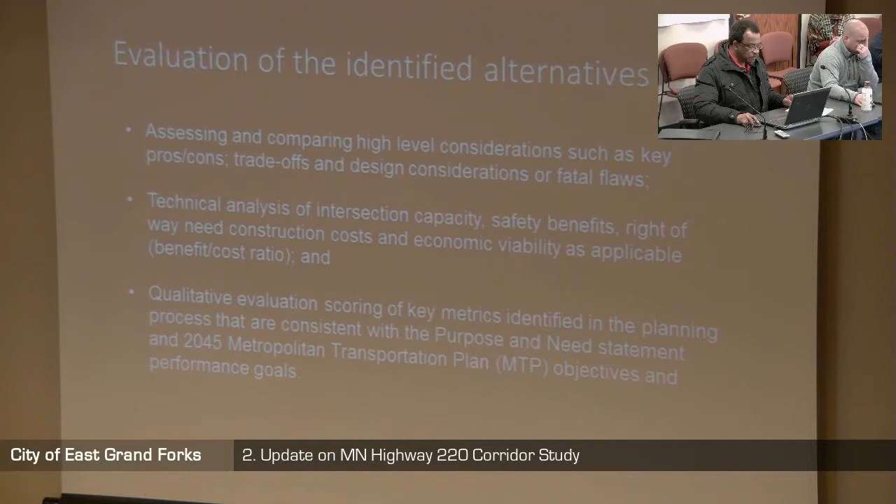It's important for us to realize that these alternatives will be incorporated within the 2045 Metropolitan Transportation Plan, and therefore we need to continue advancing them toward further implementation. The alternatives that you will see today are...

These alternatives include intersections from 9th Street as far as 140th on the 220 North Corridor. Those fall into 4 kinds of types: access and traffic control device considerations, access management, traffic signal, and pedestrian improvement strategies.

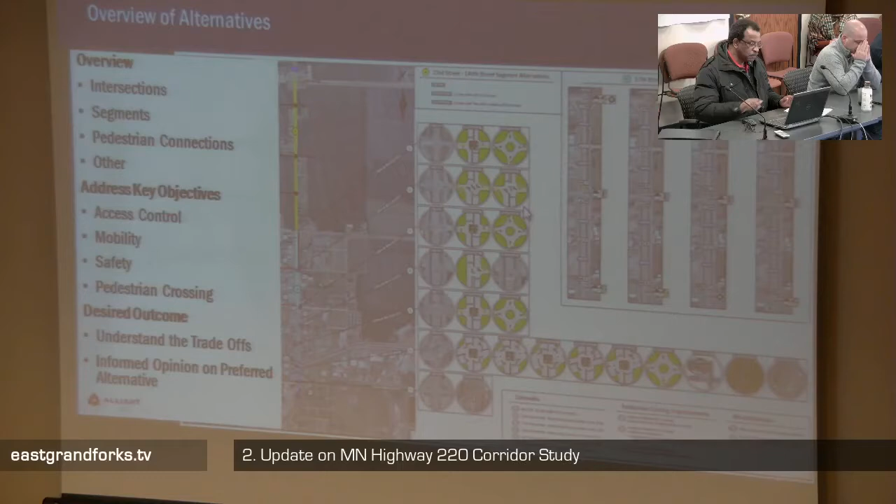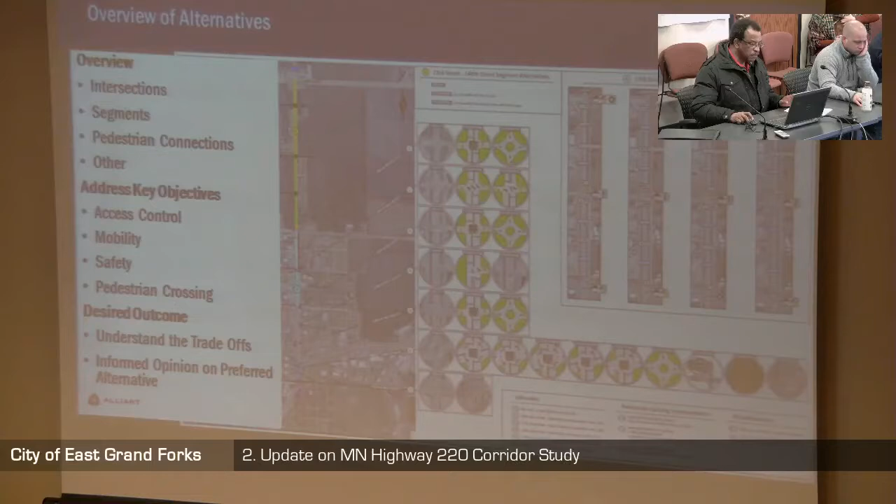So in one of the packages that you received, you can see them outlined, each one of them, including the pros and cons of each, and also the objectives that each proposed strategy is trying to address. So this is my brief introduction, and now I'll leave you with Engineer Darren Lash. You may continue.

Good evening, I'm Darren Lash, Planning Director for the Northwest District for MNDOT. I guess today I'd just like to give a little bit of the why, some of the findings we discovered during the study, and then go over in more detail the preferred fixes that were identified, and our timeline for constructing those. I'll try to be as quick as possible.

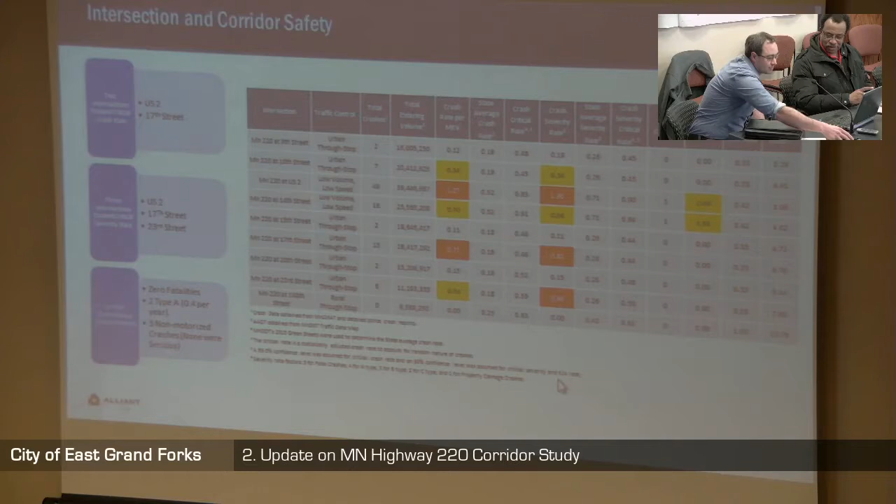I don't know if I'll stay within 2 minutes, but can you check to make sure your mic's on too? Is it flipped up? It should be up. Yep, right.

Kind of first the why—this really came out of, a few years ago we did the Business 2 study, Business 2 and US 2, and it was identified and talked about: well, why aren't you looking at 2 and 220? That's where the problems are, and that's been identified a number of times, and it's in our safety plan—always one of the top intersections in our safety plan. And we didn't have a real good solution for what to do there, so we thought this study could really help guide us on what improvements we can make.

The other critical intersection we need to make improvements on soon is 14th Street. That signal—some of the wiring and conduit under the pavement is in very poor condition—and if we have any problems with that wiring, we really can't fix it in the interim.

So we need to replace that signal system very soon. And before we replace it, we want to make sure that's the correct fix, that's the long-term vision for that intersection. So those are kind of the two driving forces behind why MnDOT wanted to move ahead with the study.

As we started investigating this corridor, we did confirm that US 2 and 220 is a bad intersection. 49 crashes in a 5-year period, well above what you'd expect to see at an intersection with those volumes and that lane configuration. So we documented that.

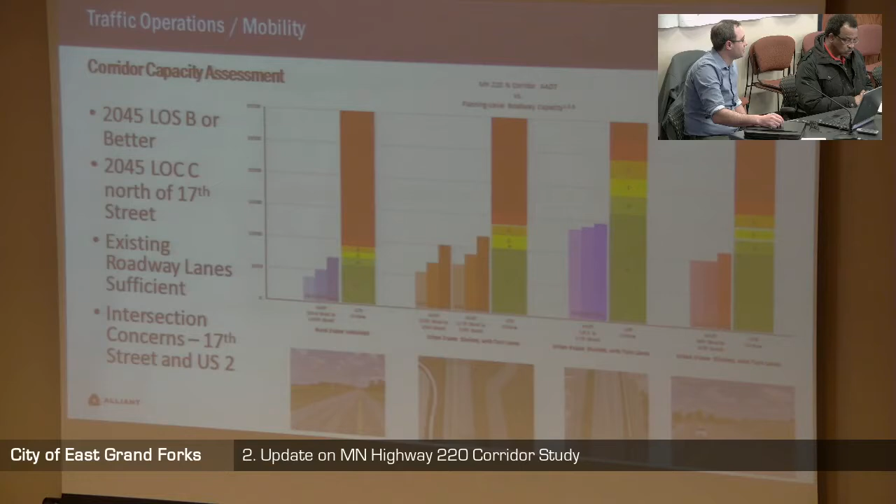So those are the high-level issues identified with the corridor study. This is a rough outline of the area we looked at - I'll focus most of my attention from US 2 out to 23rd, since that's where I see the bulk of the recommended changes.

As Jairo mentioned, we looked at signals, roundabouts, and some different geometric changes, especially at 2 and 220, plus a few tweaks at 20th and 15th. The preferred look at 2 and 220 for a roundabout would have to be a 2x2 roundabout with 4 lanes coming in on all sides.

Comparing that with some of the roundabouts we've done across the state, you generally still see a lot of crashes - you get your serious crashes down, but your overall crash number would probably go up. So we ruled out a roundabout at that location pretty early in the process, which led us to different signal configurations and geometric changes.

As you go over to 14th, we looked at a roundabout there as well, but with 4 lanes on the north and south leg, it's a 2x1 roundabout, and you still need a pretty large diameter. With the frontage roads and proximity to the highway, it really wasn't feasible to fit a roundabout in that location. So the study identified that a signal still needs to remain at 14th.

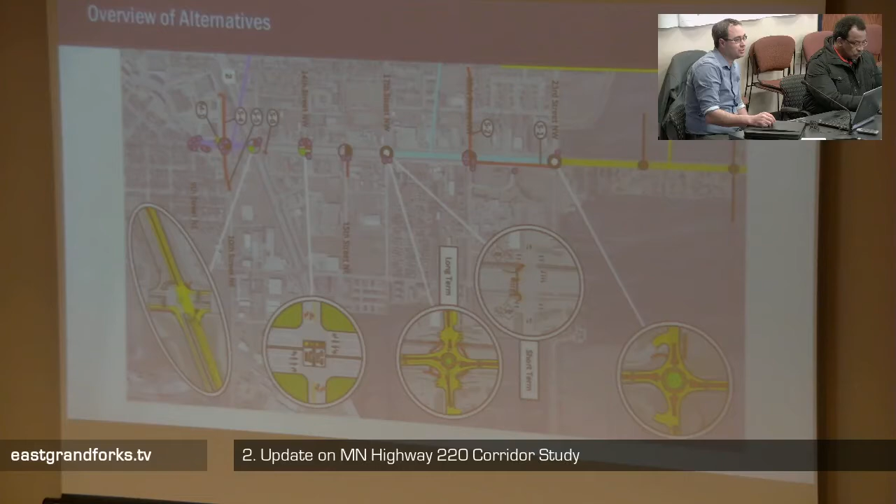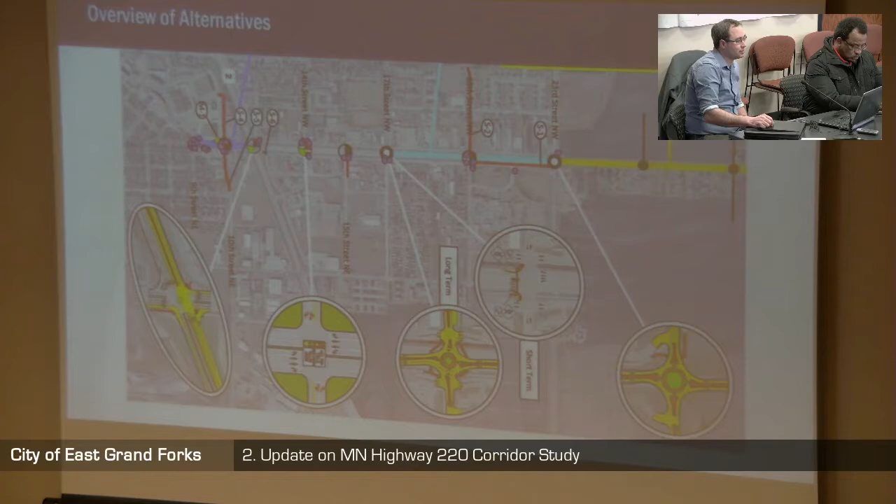As you go up to 17th and 23rd, that's where we make the switch from a 4-lane facility to a 2-lane facility. Single-lane roundabouts have a lot of advantages, with a significant crash reduction and some operational benefits. When you compare putting a signal at 17th and 23rd to a roundabout, you see significant delay reduction with the roundabout, whereas with a signal you're seeing more delay than you have today. So there's real advantages to that roundabout.

I'm going to go over these in a little more detail for each intersection. Looking at 2 and 220, we're looking at mainly some minor tweaks. This includes offset left turn lanes at the center, which is probably going to mean some widening. That just provides better sight lines, and there's going to be less interaction with the left turning movements.

We also looked at adding flashing yellow arrows in the permissive movement instead of a green ball. That's basically a yield left turn movement at a signal, but we found there are some safety benefits to that, and it gives you the option to have, at times, a protected left turning movement where you get the green arrow and red arrow, and other times the flashing yellow. So you see some safety benefits with that.

The other big concern at this intersection is those free rights. Looking at the northwest and southeast quadrants, those free rights can be a challenge because sightline-wise you're cranking your head way back to see those vehicles, and there's really not an acceleration lane, so you have to make a quick merge. So you either get people trying to squeeze into a gap that's too tight, or someone slamming on their brakes and the person behind them doing the same, causing rear ends. So we're looking at eliminating that in those two quadrants. It has a minor impact on operations, but we feel the safety benefit is important.

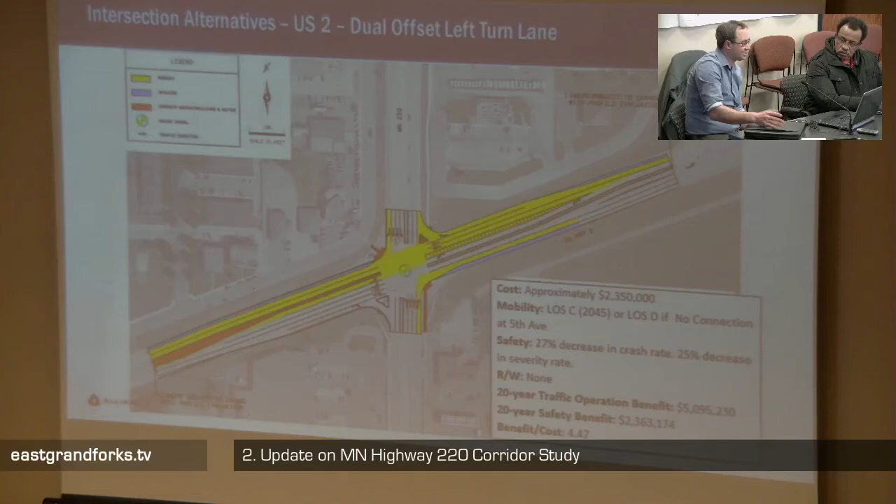On the other two corners, we really couldn't do that because of the skew at the intersection — trucks couldn't make that turning movement without the free right, so those will remain, but I don't think those are as problematic. In a nutshell, we're hoping for about a 30% reduction in crashes. Still not certain if we got the right answer here, but other than looking at more major improvements along Highway 2, I think this is the next step, and hopefully we get that 30% reduction, which would put us into more of the average we'd see in other communities.

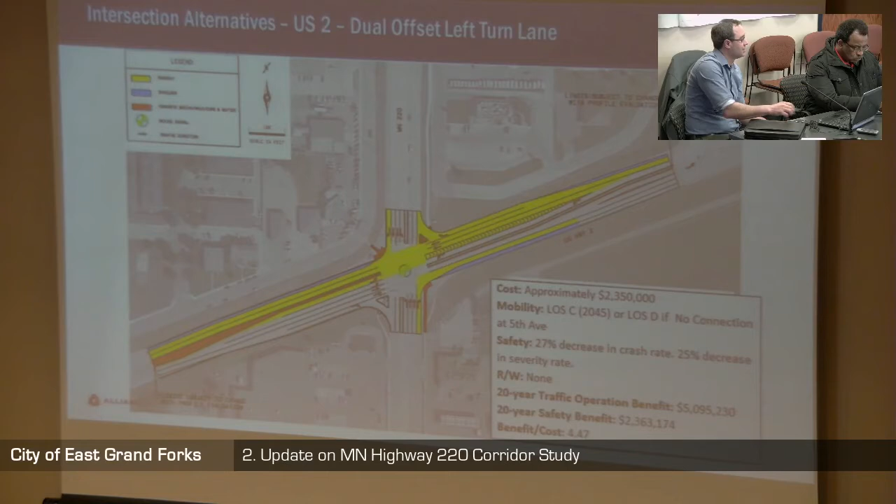Looking at 14th, that one's going to stay very similar. One of the big advantages to this one and 2 and 220 is if we update those signals, they can all be interconnected, so the signals are talking to one another. That will improve flow of traffic and move those queues through so there's less stop and go, less chance for a rear end — that's where you see the majority of crashes, rear ends at these signalized intersections. So not a lot of other changes at this intersection.

Moving up to 17th, this is where we've gotten a lot more discussion than we've had so far, and what I'm showing here is kind of an interim solution. Looking north of 14th, this isn't a short-term need in our opinion — the pavement's in pretty good shape, and nothing jumped out that said we need to get into these intersections and improve them immediately. So we're looking at allowing that pavement to degrade, and these intersection improvements will probably happen at a later date.

But we did hear that there was a pedestrian crossing need at 17th. So this is the interim solution that we felt maybe we could deliver along with the 14th and 2 and 220 improvements: adding some bump outs, eating up that shoulder space to shorten the distance the pedestrian is out in the travel lanes, and potentially adding a median refuge to provide a safe area for pedestrians and enhance the crosswalk markings and signage.

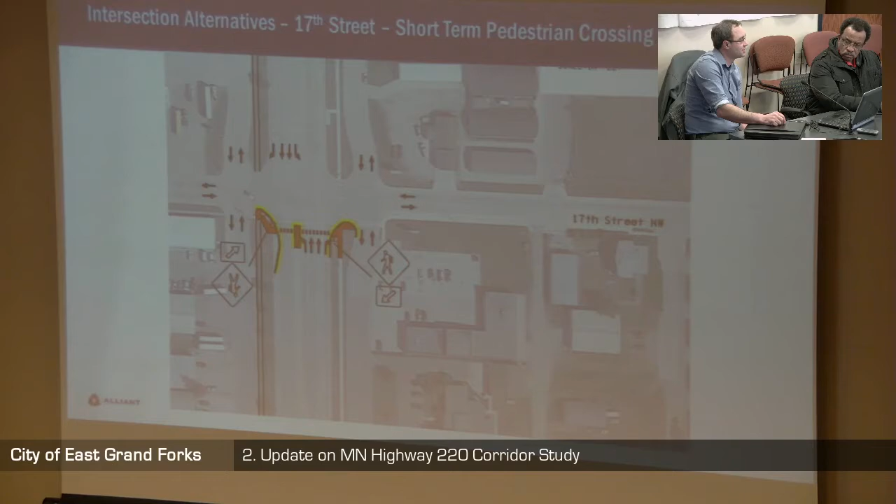Where if you go to the roundabout, you're crossing 2 lanes of traffic, and you're doing that in 2-stage movements. So that pedestrian basically needs to cross about 16 to 20 feet of pavement. They get a refuge, and they can cross another 16 to 20 feet of pavement. We feel that's a much safer and much more comfortable place for a pedestrian to be.

With the roundabout, that forces traffic to slow down to about 15 miles an hour. If you look at the difference with a crash at 15 miles an hour compared to 30 miles an hour, your chances of walking away at a 30 mile an hour crash are much lower than at a 15 mile an hour crash. So you see some significant pedestrian safety benefits with the roundabout.

There are some negatives here with the roundabout, and it all kind of hinges on these frontage roads being so close. We were looking at some different options, and we're kind of leaning towards this option of sliding the roundabout to the east.

So we can keep that frontage road on the west side open, you can still go north-south through there, and a car can still make all the movements on the west side there. A truck heading south would not be able to make the left turn movement out into the roundabout, so trucks would have to head north and get back out onto Highway 220 at 20th Street, which we would leave as is.

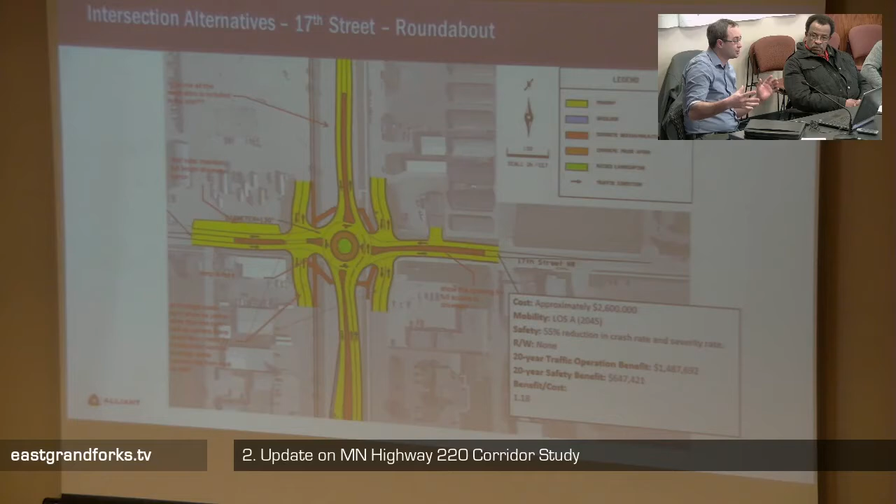It's not ideal. I guess the other option that we decided not to look at, because it would be a big change, is eliminating the frontage roads as a whole. But there are a lot of advantages to managing accesses and getting those onto the frontage roads, so we feel that this is a nice compromise.

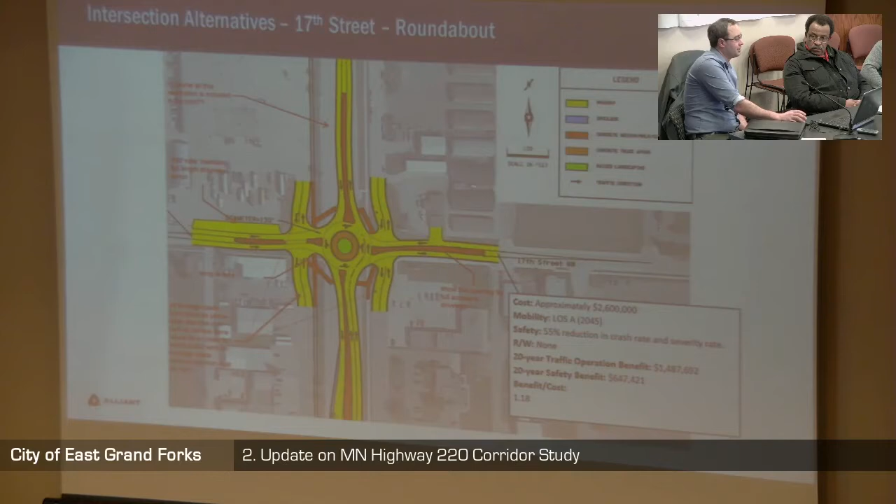I'll touch base on some of the truck turning movements. We looked at a truck with a wheelbase of 67 feet, that's a 53-foot trailer. That's kind of our design vehicle for all our highway projects.

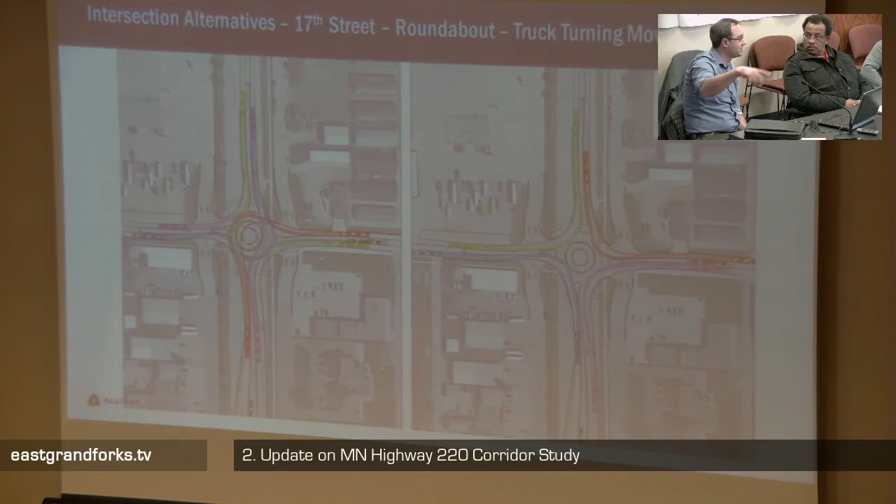Pretty much a truck can make all the movements within the roundabout. The only restriction for a truck that size is that southbound truck on the west frontage road that wants to get out into the roundabout. They're going to have to head north.

And then at 23rd Street, the preferred alternative, again, is a roundabout. This one works a little bit better because the frontage roads kind of bell out, so you have that separation, and you're not changing any kind of operations with the frontage roads. Once again, you get that big safety benefit.

This is kind of an area where we really have a lot of struggles putting a signal, because you've got those higher speeds coming in. With a signal there, all it takes is one person running a red light at 60 miles an hour, and somebody's going to get killed there. We see that in a lot of communities where you've got that first signal coming in, it can be real problematic. So we really like to see a roundabout at this point.

It's kind of that gateway into town, that cue to tell people you're coming into an urban area. It gets them slowing down.

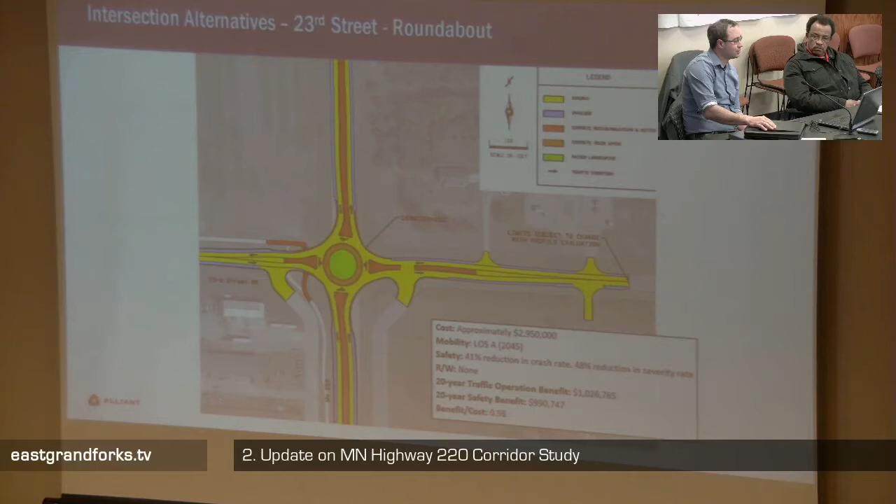You've got to go 15 miles an hour through the roundabout. Then it's comfortable to drive 30 as you go through the rest of the corridor. So we see some real benefits there to making this a much safer urban corridor for anyone walking, biking, or driving.

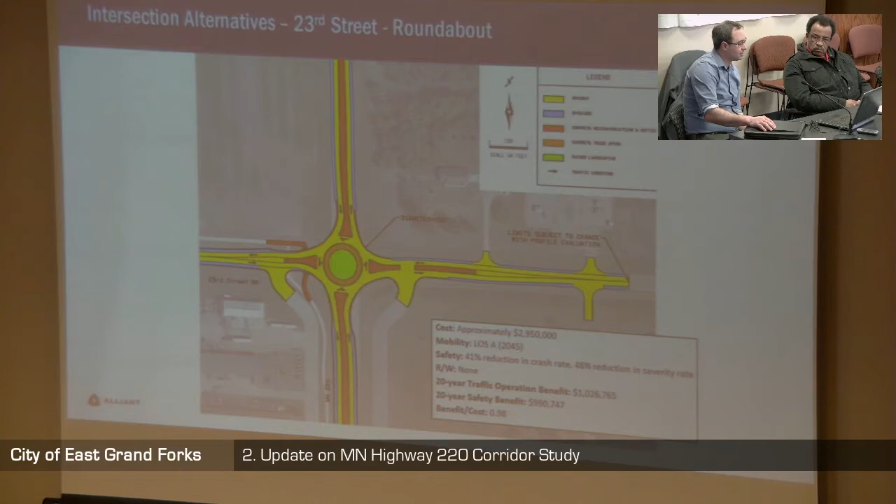So with that, I think I'll open the floor to questions. Questions? Mark? Thank you, Mr. President. Darren, on the 2 and 220 options or alternatives that are mentioned...

The east-west offset option that you presented as the best case — I noticed that there's no alternative for offset for the north-south left turn movements. Is that because of cost, or is it supported by traffic or crash data, or is it just because of the space, particularly on the south side of that intersection?